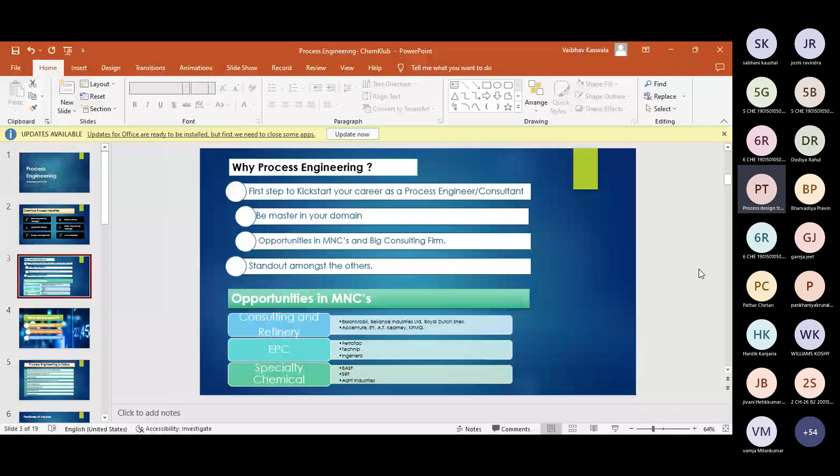When we talk about process engineering, what you will be learning - we will cover what is basic engineering, how basic engineering is done, how designing is done. Basically designing of distillation column, exchangers, pumps, design basis, how to prepare a design basis, heat and mass balance, PFDs, PDS, P&IDs, IPDS. So HMBs (heat and mass balance), PFDs (process flow diagrams), process data sheets, IPDS (instrument process data sheet). Whatever documents are required related to the design, how to prepare those documents, how to select the equipments - that is what we will be focusing on in all our courses.

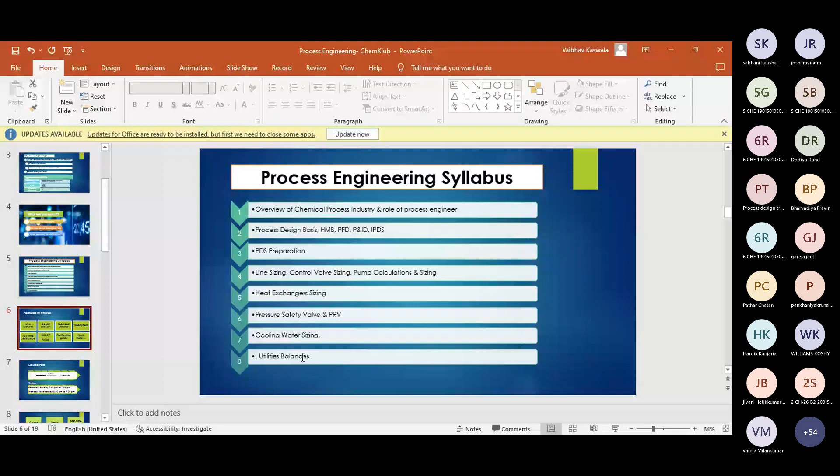So what all features are related to the course that we are displaying? First of all you will be having live lectures. Poora jo course hai uske jitne bhi topics hain uska hum detail time table dete hain based on the date as well as timing, and jo bhi lecture lenge unka naam rahega, tutor ka naam. We will strictly follow the schedule. As per the schedule we will share the link on Microsoft Teams and you can join the live lecture. If some student is not able to attend the live lecture, then you can also have the recorded lectures.

We will separately have a doubt clearing session if any student has doubts. There will be weekly tests. Full time assistance will be there - so at any time anyone has any query, you can directly contact the tutor, or you can post your query on the WhatsApp group also.

Certification guidance - there are also some courses where certification is required, so we also provide courses on HTRI, Aspen, Aspen HYSYS. There we will also help you to get the certification. Uska ek exam bhi rehta hai, so we will also guide you through that certification.

And through our community we will help all the students to know about the industries. We will help them make contacts so that they can get to know other people, other students who are working in this industry. So basically through this we are building a community.

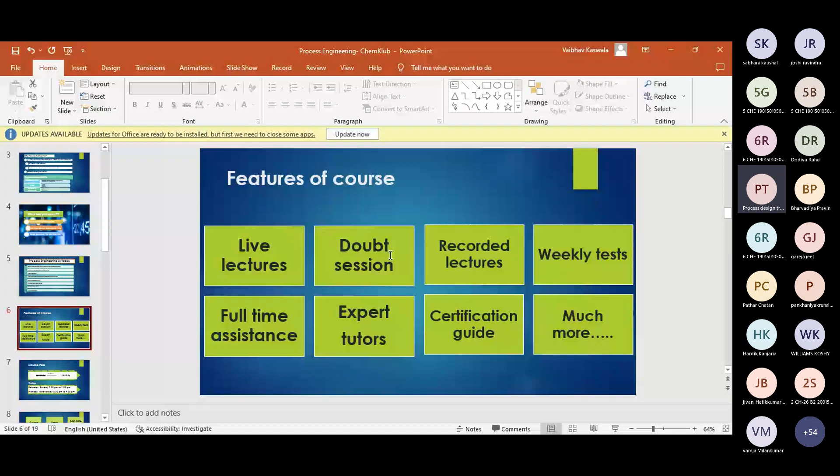Mostly the course sessions happen in the evening, somewhere around 7 to 9. So whoever it is, a student or a working professional who is working from morning 9 to 5, they can easily attend in the evening. We also have flexible timing - if multiple students are not available at a given time, we can shift it.

So basically how you can register - this is our website, www.chemklub.com. You can go to the course section, whatever course you want you can add, make the payment and you are ready to go. If you have a query, our backend team will be there to help you.

So what all different courses will we basically be providing: Aspen Plus, Aspen HYSYS, Aspen EDR, and Process Design Engineering. This course is the well-known course where we'll be covering the entire designing part. Distillation - we also have a very short course on distillation. And PSV sizing.

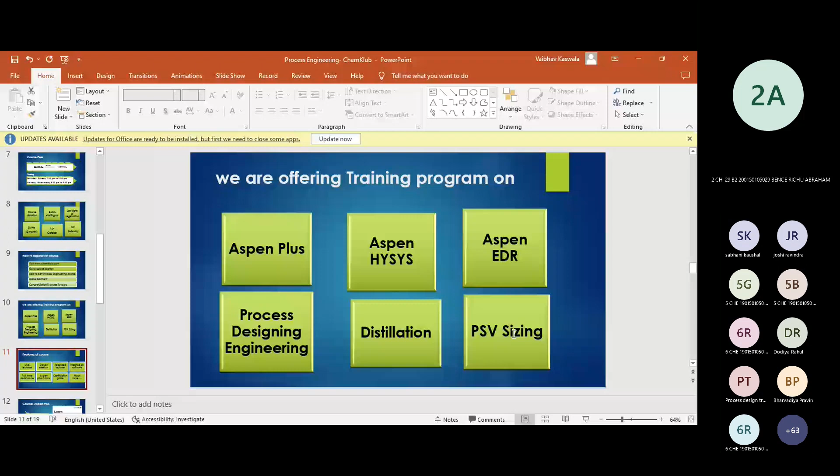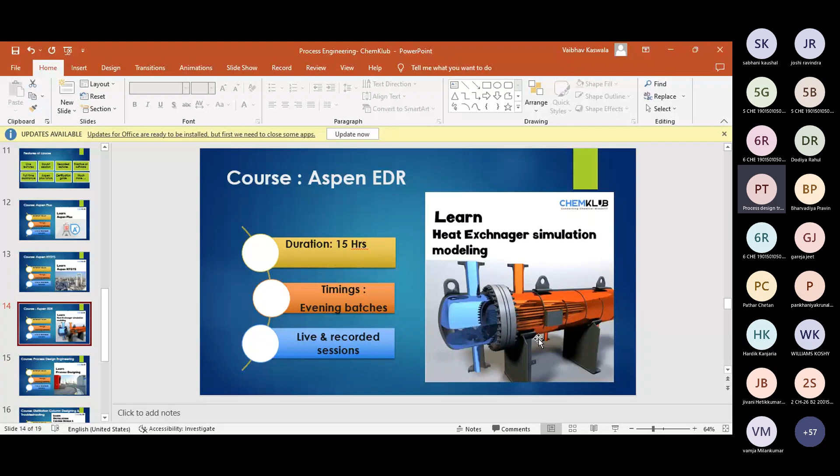Related to Aspen Plus, the course duration is 24 hours, mostly an evening batch. Similarly for HYSYS, it is again the same - a 24 hours course. So mostly every day a 1 hour session will be there, and this course will take place in 1 month. So these two, Aspen Plus and HYSYS, are both 1 month courses. Aspen EDR is again somewhere around 1 month, less than a month course. Process Design Engineering is a 2 month course, detail engineering. So let me let you know how this Process Design Engineering course is.

Distillation - this is a 10-day course where everything related to distillation, A to Z, right from the core principles and principles of distillation to its design, troubleshooting, selection, internal sizing - everything related to distillation, totally the design related to the distillation column, we are covering. So this is a short 10 days course.

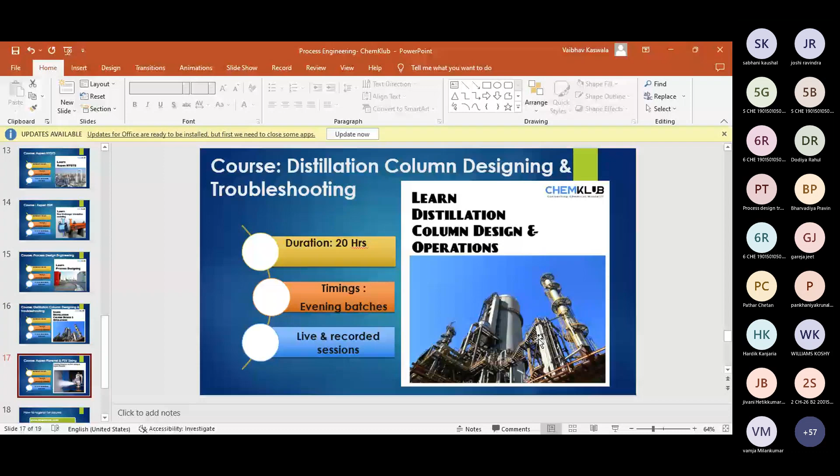Aspen Flarenet and PSV sizing - related to process safety, it is also again a 1 month course. So this is the range of our courses that we are providing, correct?

Okay, so that's it, this is basically about the ChemKlub. So does anyone have any queries related to the courses, or any questions till now? Anyone, any student want to ask anything?

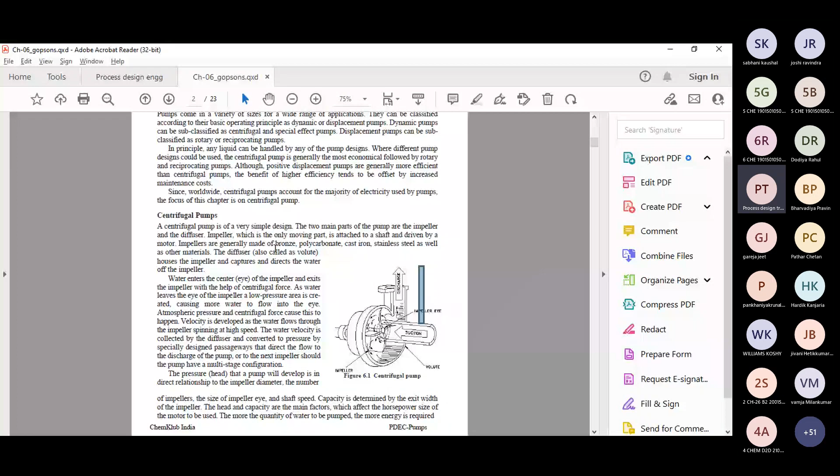So the principle of the pump says: the principle of the pump is when the water or any fluid enters the eye of the impeller and exits the impeller with the help of a centrifugal force. So it basically boosts the kinetic energy, and ultimately it develops the pressure. So that is how basically a pump will operate.

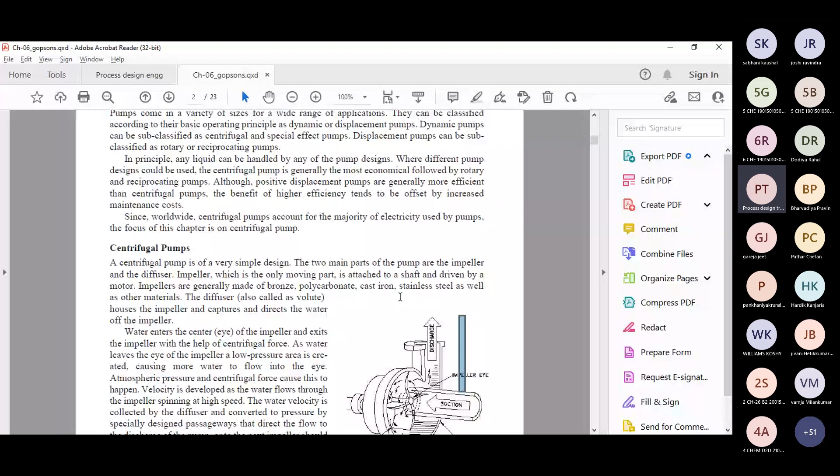So what are the different parts of the pump? When we see a pump, there is one suction, one discharge, there is the impeller, which is the main part of the pump, on which this pump will be operating. So what is the impeller?

Inside the impeller there is basically an assembly which is connected with the rotor, and when the rotor rotates, that impeller is designed in such a way that it will direct the fluids towards the periphery and ultimately discharge it out of the pump. So the pump basically increases the velocity of any fluid and ultimately develops the pressure.

So now can anyone tell me which law will be applicable to the pump? We study this in college, so which law is applicable to the pump? Which equation will the pump follow? Yes, you must have studied this in fluid mechanics. Can anyone tell me? Anyone?

Velocity increase, pressure decrease. Yes. Which law is applicable? Sir, FMT laws. Yes, your voice is not clear. Continuity equation. Yes, so that is basically, sir, Bernoulli's equation. Bernoulli's equation will be applicable, right?

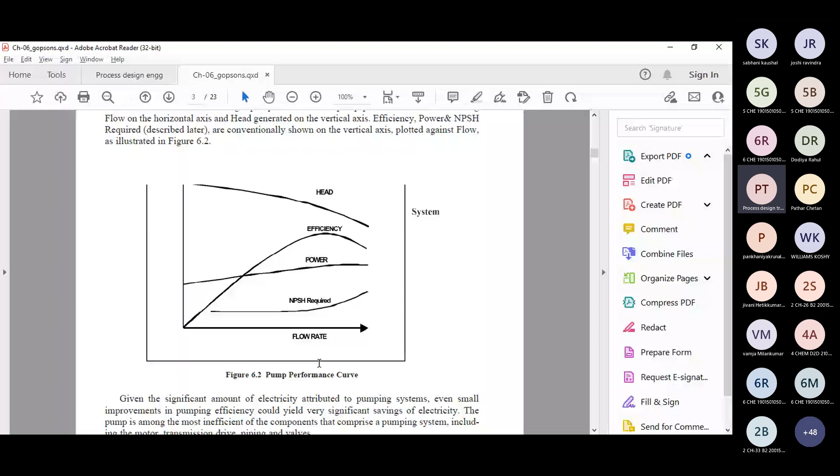पंप कर्व्स के बारे में पढ़ा है सबने? No sir. ओके, तो पंप कर्व्स मतलब क्या रहता है?

So whenever you are operating a pump - जैसे कि आप कभी भी कुछ चीज परचेज करते हो, आप एक्सपायरी डेट, इंग्रेडिएंट्स, कंपनी, टेस्ट देखते हो। Similarly, whenever you are buying a pump, before buying it the vendor will supply you with the pump curves. वो pump curves में आपको शो करेंगे कि अगर हमारा पंप चलेगा तो how it will be operating. So that is basically the pump curve. This is the most highly important topic related to pumps.

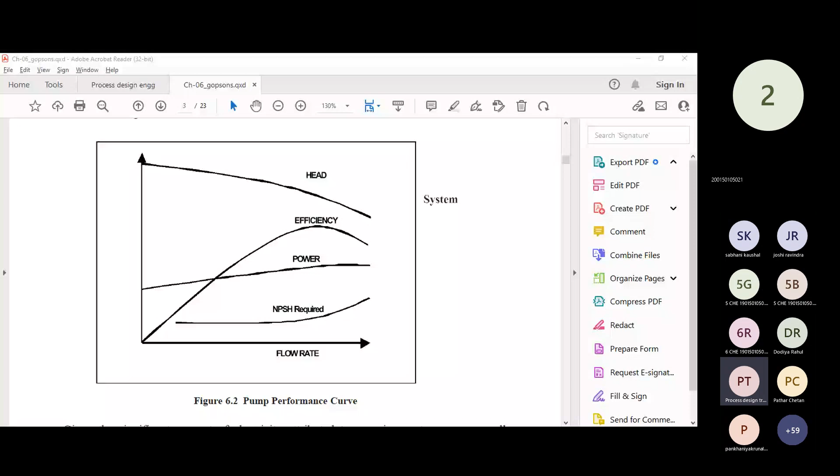So just my advice is be thorough with the pump curves, because you will definitely 100% face these questions in your future interviews or campus recruitments. So this is a very important topic.

So when we talk about the pump curve, on the x-axis always there is a flow rate - that is the flow rate of the pump. अगर समझ में नहीं आया, any doubt है, then you can ask in between. So with respect to the flow rate, how the different parameters will vary for that particular pump, that basically the pump curve will show.

So on the y-axis when it is the head, that is the pressure developed by the pump. जब भी आपका flow rate zero है, on x-axis it is zero, तब आपका head maximum है, because your shut off valve, your discharge valve is closed. तो जब भी पूरा पंप का आउटलेट वाल्व क्लोज है तब फ्लो रेट जीरो होगा और प्रेशर मैक्सिमम होगा। जैसे आप वाल्व खोलोगे तो आपका फ्लूइड मूवमेंट शुरू हो जाएगा।

So your fluid is getting some velocity. As the velocity increases your pressure starts dropping, because Bernoulli's equation कहता है velocity head मतलब v square by 2g। So your velocity starts increasing, so your pressure will start decreasing, because p plus gz plus v square by 2g is always constant as per Bernoulli's equation. So your pressure starts to drop. So that is basically the head and flow rate curve.

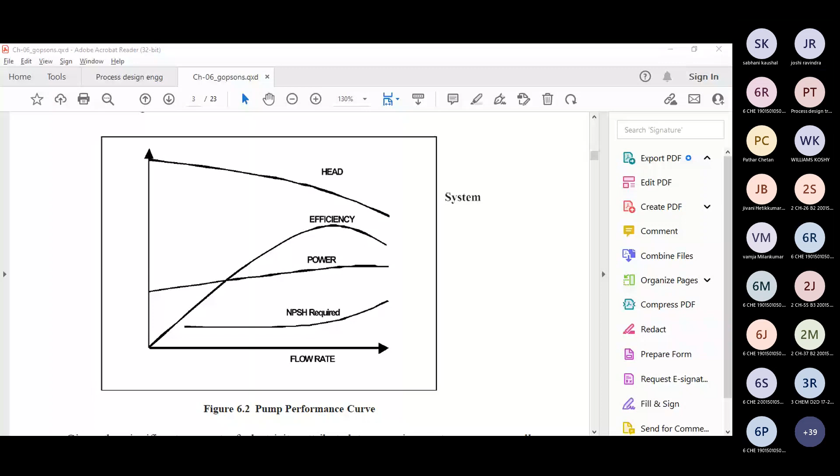So we have the equations for the power that is generated. So how basically you will be calculating the power, right? Power में भी कैसा रहेगा?

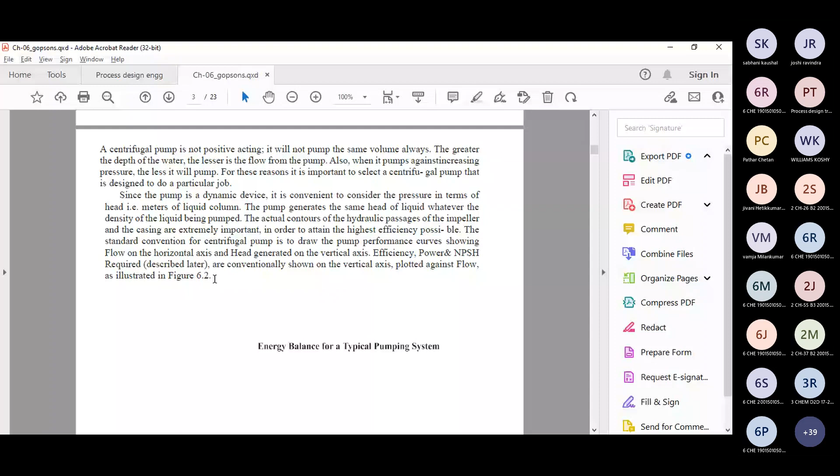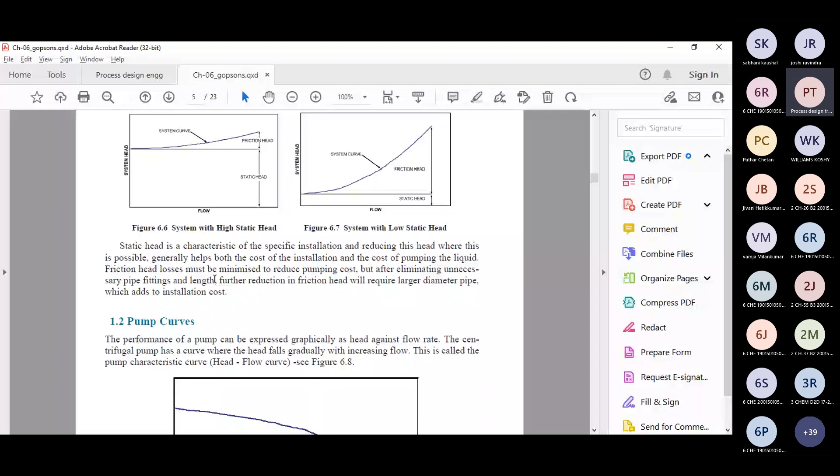So when we talk about the power, ऐसा क्यों हो रहा है?

आपका first of all you are giving some power to the motor. To the motor that power is going to the pump, and from the pump that power is going to the fluid. तो जो पावर, हाइड्रोलिक पावर मतलब क्या हुआ, आपको जो वर्क डन मिला बाय द पंप.

सो वर्क डन बाय द पंप इज बेसिकली रिलेटेड टू हेड एंड फ्लो रेट ऑफ द पंप. तो पंप ने कितना वर्क डिलीवर किया, वो डिवाइडेड बाय पंप को कितना पावर मिला - सो वर्क डन बाय द पंप डिवाइडेड बाय द पावर सप्लाइड टू द पंप, दैट इज बेसिकली कॉल्ड द पंप एफिशिएंसी.

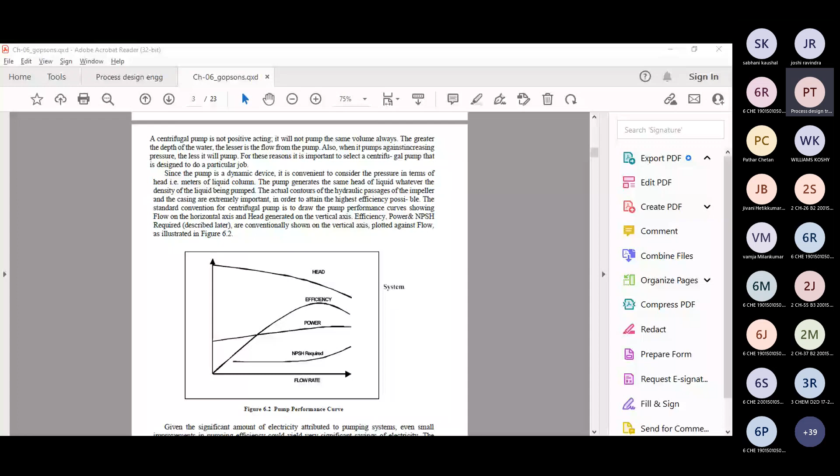तो ऐसा भी हो सकता है कि पंप को जितना पावर दिया, उसमें से पंप ने कुछ वर्क किया - the work done by the pump - और पंप ने कुछ लॉसेस दिए, losses related to friction, losses because of cavitation. आपका पंप गर्म हो जाएगा, it is dissipating some energy in terms of heat, frictional losses, heating of the sealing system, heating of the shaft. So that is basically the losses from the pump, so उसका efficiency कम हो जाएगा. That is related to the pump efficiency.

Similarly motor will also have some efficiency. Suppose you are supplying 100 kilowatt of energy to the motor, then motor will give 85 kilowatt of energy to the pump. 85 kilowatt pump का input हुआ, जिसमें से आपको effective 65 kilowatt of work done you will get. So आप देख सकते हो कि 100 kilowatt I am supplying और मुझे सिर्फ end में 65 या 60 मिल रहा है। So there is a drastic consumption of energy because of losses.

So आपका मोटर में लॉसेस क्यों होता है? कोई बता सकता है why there is losses in motor? और generally you will be shocked to see कि अगर मोटर में हम 100 किलोवाट पावर देते हैं, then motor gives generally 80 किलोवाट ऑफ आउटपुट. सो 20 किलोवाट, approximately 20% losses happens in the motor. So why that losses happen?

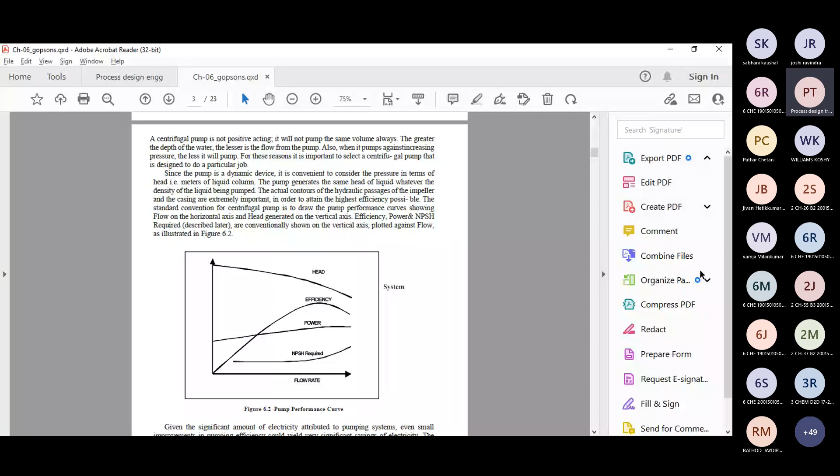So basically hydraulic power is the flow rate multiplied by the total head developed by the pump multiplied by the density, the gravitational constant, divided by 1000. So what is the pump shaft power?

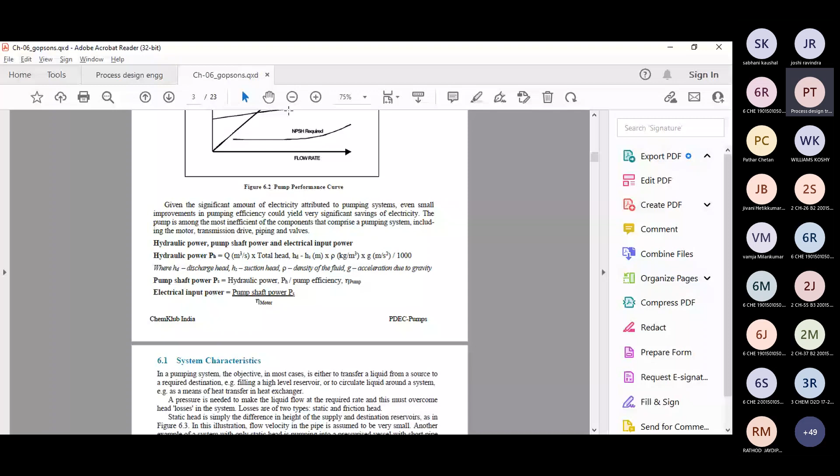यहाँ पे हम pump shaft power - what we do in industry - either you calculate the efficiency or you calculate the input to the pump shaft. So generally efficiency of the pump is equal to hydraulic power or the work done by the pump divided by the power provided to the shaft. So हम क्या करते हैं, we assume the efficiency. Suppose हमारा pump 70% efficiency से काम करेगा, तो हमें उसको कितना shaft power देना है. So suppose I have some flow rate, some head I have decided, so I want my pump to do some hydraulic work. So that is the hydraulic power divided by 0.7, because my assumption is I want to operate my pump at 70% efficiency. तो मुझे पता चलेगा कि पंप के शाफ्ट को कितना पावर देना है.

So once that power is calculated, what is my electrical input power? The pump shaft power divided by the efficiency of the motor. Now efficiency of the motor is 80%, so that is 0.8. Whatever power comes out, this power is the power input to the motor.

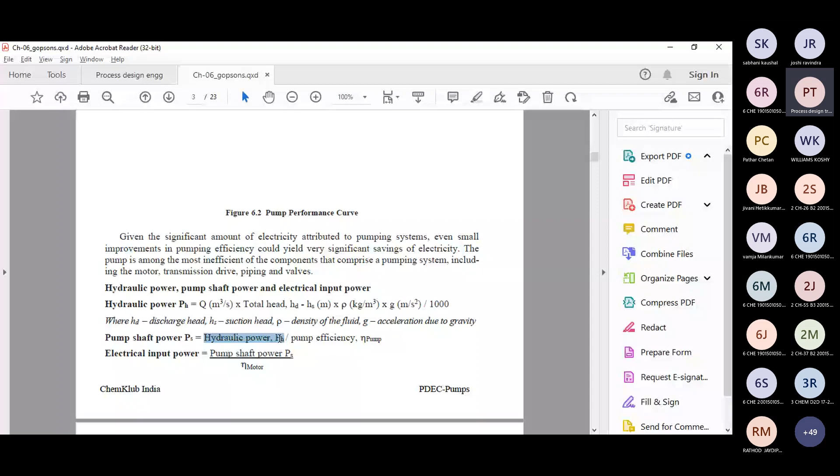So I need to give the motor a particular power, because of which 80% loss will happen in the motor, 70% loss will happen in the pump, and then I will get my desired hydraulic power, or my pump will give the desired work done. Correct? So this is how basically we will do the sizing and power load calculations for the pump, right?

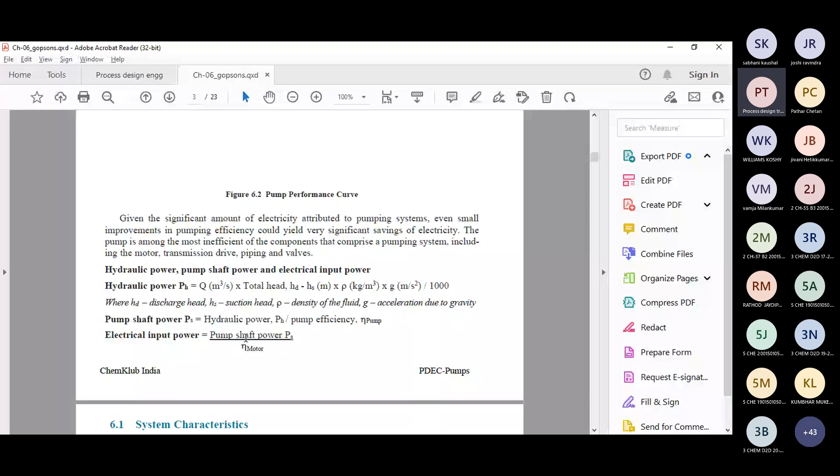So moving ahead, we have different case studies. What are the system characteristic curves, right? So all these details, the system curve, friction head versus flow curve. There is still a huge amount of depth in this particular topic, right?

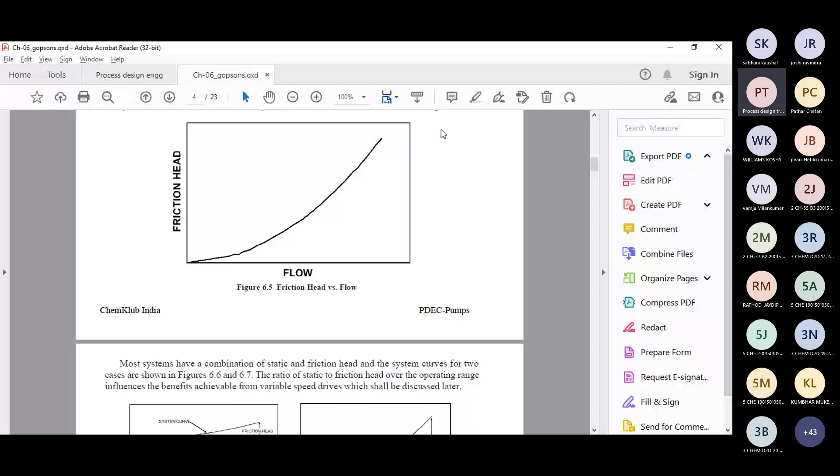So what I meant to give is how basically this sizing will be done, right? How we are providing the material, so that it can be useful for the students. They can also learn in a simpler way whatever topics are not covered in academics, that we will be covering over here. So the main aim is to bridge the gap between academics and industry, so that it will be easier for students to understand.

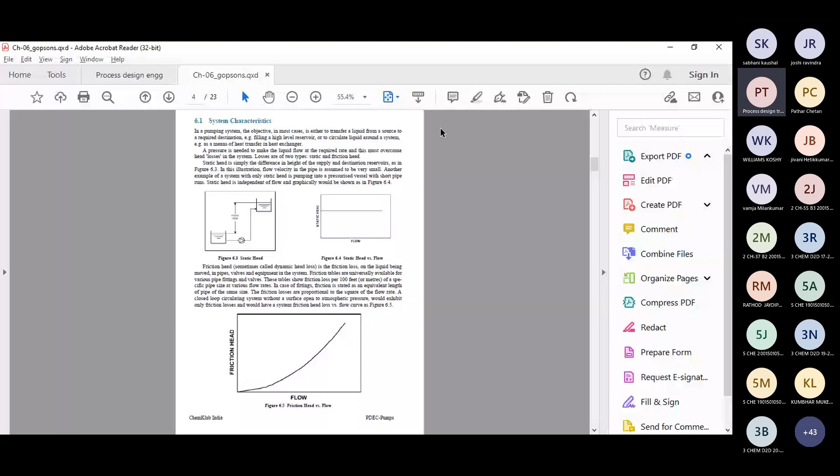So generally what happens is whenever students go into industry, it takes at least 2 to 3 years to get settled. You'll take 3 years getting used to it, understanding the concepts. So if you are going through this course, you are understanding it even during your college days. So once you join the industry, whatever 3 years you were taking, that time will be shortened. You'll start learning everything within 1 year. So you will be easily able to understand how it is basically operating, correct?

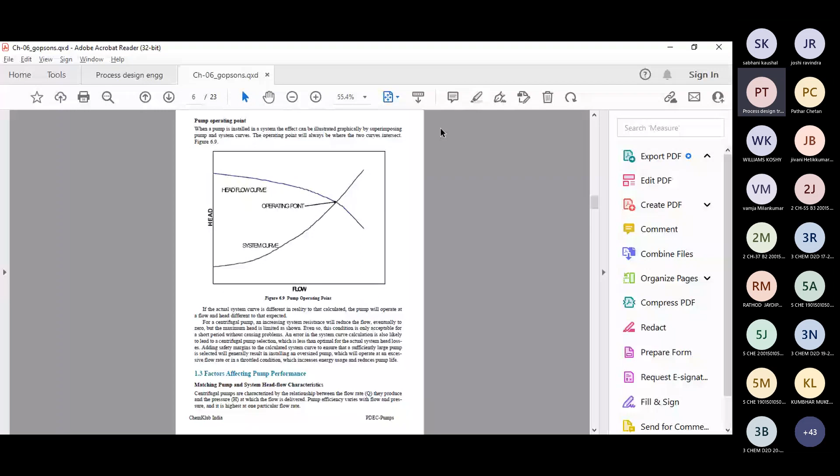So that is about the pumps, how this is... some case study, that is effect of oversizing of pump. If someone makes a mistake and oversizes a pump, this is how that can affect things.

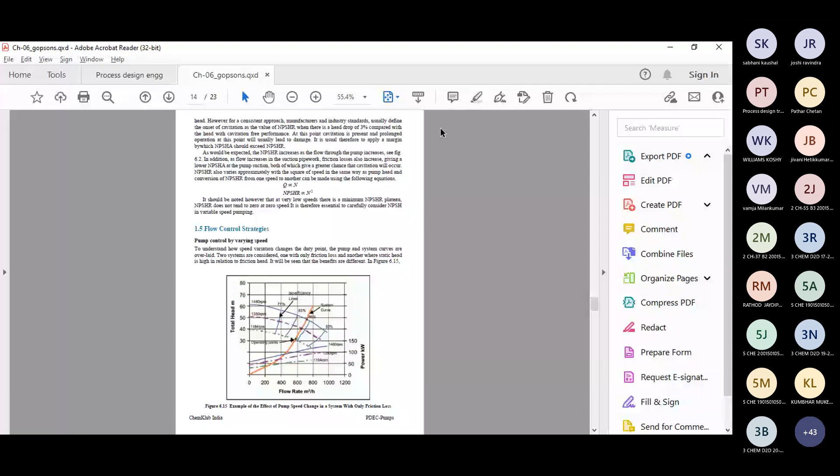Hello, sir. I guess your voice is not there. We can't hear you, I guess.

Hello. Yes. Hello. Everyone, is able to hear the voice of sir? No, ma'am, we are not able to. Yeah, okay, I'll just talk to him. Just a minute please.

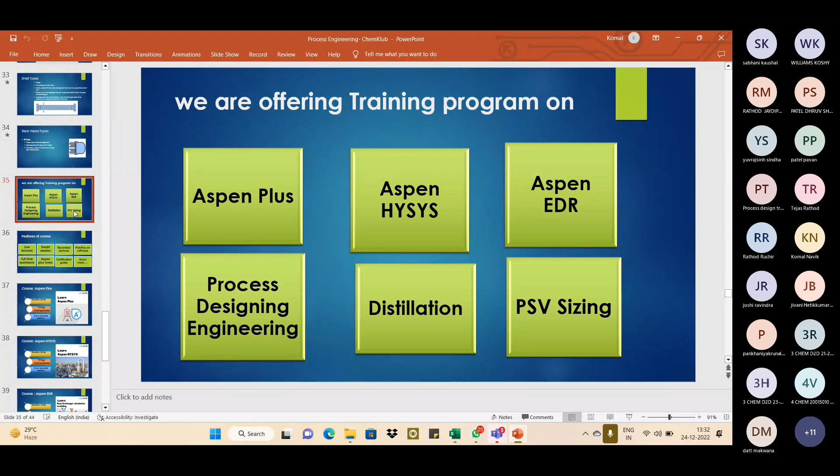So these are all the training programs we provide: Aspen Plus, Aspen HYSYS, Aspen EDR, Process Design Engineering, and the course duration is this. If you have any doubts till now, you can ask me, or otherwise if sir has joined, we can continue.

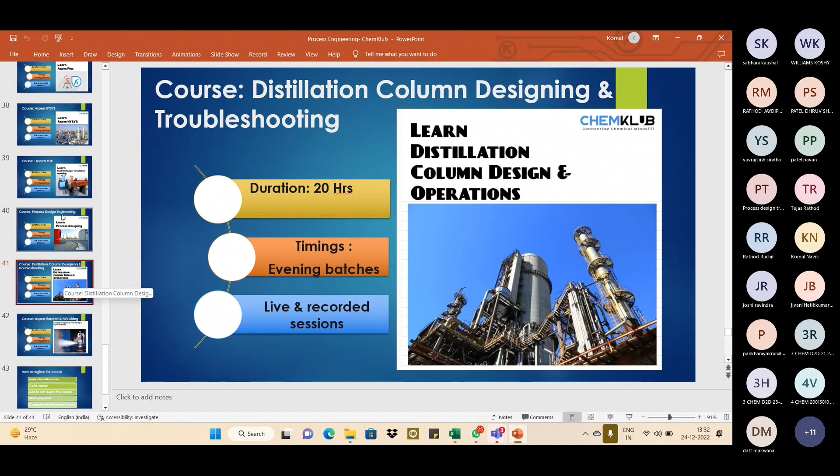Yes, does anyone have any doubt? Hello. Ma'am, yes ma'am, can you change the meeting setting? Someone is removing continuously, who is removing? Just let me check. I guess one of you is doing something.

Anything regarding the courses or training programs? Do you have any doubts? So we can go for that.

Please be interactive, make this session interactive. If you have any doubt, you can ask, because at degree level now you have this golden opportunity to learn all these things. After you graduate, you must acquire some skills, and you must spend your time in these training programs that you should learn during your degree. Then why are you getting late? Many people waste their time after the degree, and you have this opportunity to learn on this platform.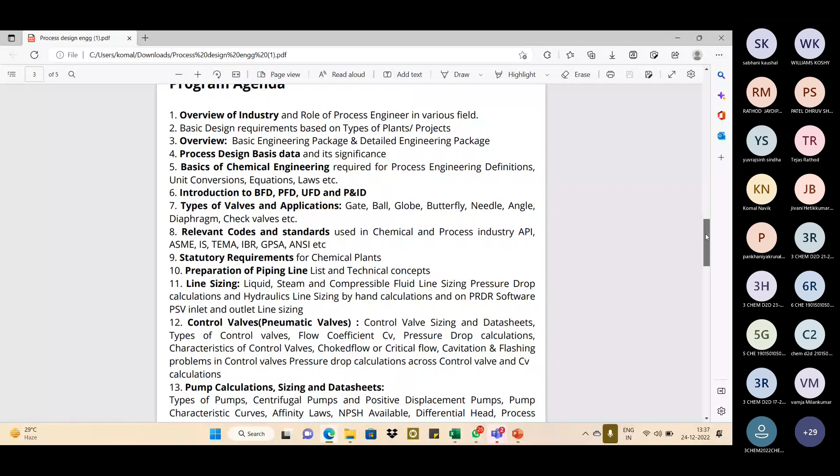Process design engineering - I have already told you all that this is a basic and detailed course for a process engineer. Am I audible to everyone? So what you need to do as a process engineer and what things you should be aware of - an overview of the industry, the role of a process engineer in various fields, and the basic requirements for a process engineer - you will learn from this course.

What are basic engineering packages and detailed engineering packages? What are the process basics - process design engineer basics like material and energy balance you should be aware of, different types of valves, unit conversions you need to know. Then all types of BFD, PFD - you must be able to read P&ID, BFD, PFD. BFD is block flow diagram, PFD is process flow diagram, and P&ID is piping and instrumentation diagram.

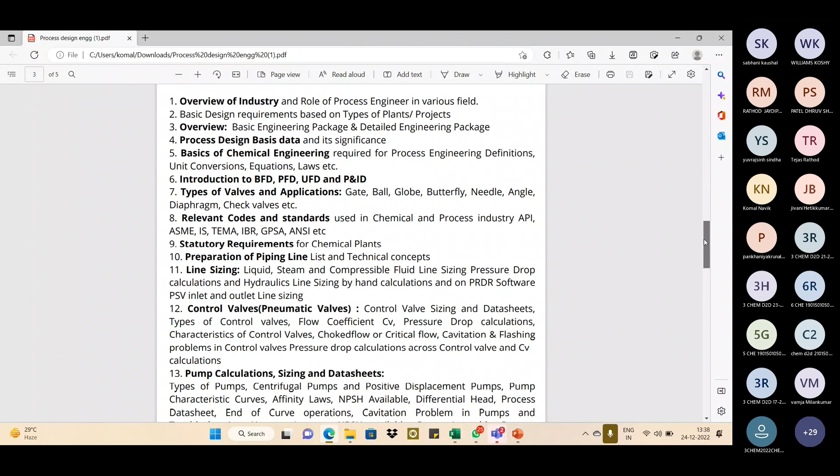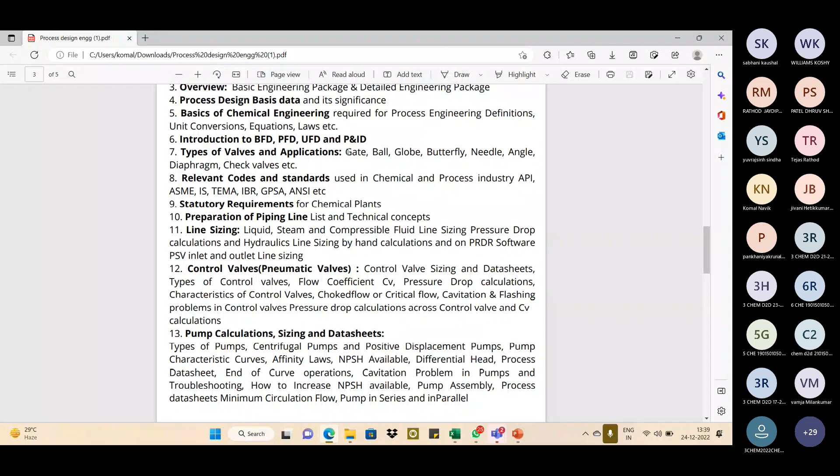All the types of valves you have already learned in your BTech program, like gate valve, ball valve - what are their purposes, what different purposes we use different types of valves for. You will learn this in detail. Codes and standards - like TEMA which we use for heat exchanger designing. There are different codes and standards we must be aware of to design any equipment. ASME is there for PSV sizing, and also distillation.

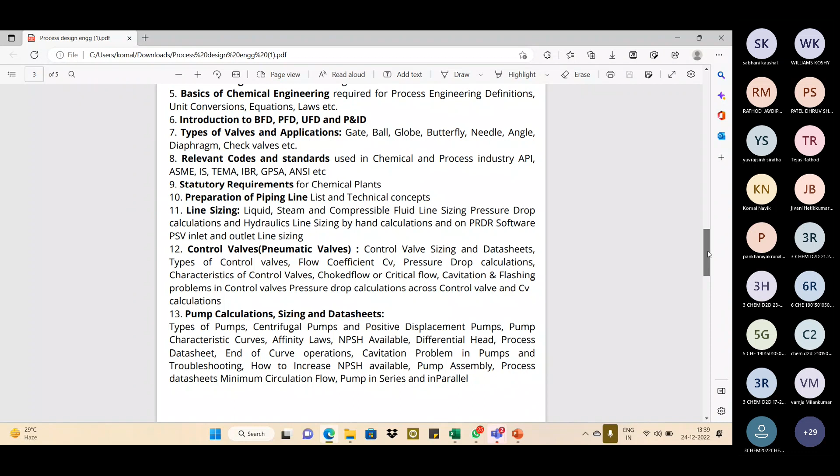Then preparation of piping line - how to do line sizing, if there's a liquid, steam or compressible fluid, what will be the pressure drop calculation. Hydraulics of a particular thing like line sizing by hand. Then control valve, and for equipment designing we include control valve, pumps, heat exchanger, distillation column, PSVs, storage vessel, pressure vessel, storage tanks. Wherever calculations are involved in designing equipment, we will have Excel sheets available to students, and calculations will be done live in the classroom session so students can understand how they are done.

Sir, you can go ahead if you're able to speak. Yes, so you can scroll down whenever I tell you. So basically, right from the preparation of the design basis, we have the heat and material balance. Then we will let you know how to prepare the BFD - block flow diagram, process flow diagram, UFD. This will be part of basic engineering. Once basic engineering is done, we will focus on detail engineering.

So what are the different types of valves, how should valve selection be done? What are the different codes and standards used for designing, and why they're required? What are the different statutory requirements - what is the Boilers Act, what is the Factories Act? All the codes which are legal or statutory requirements that a design engineer must know will be included. Then preparation of line list, line sizing - what should be the diameter, the economical pipe diameter, the schedule number. All these things we will be covering.

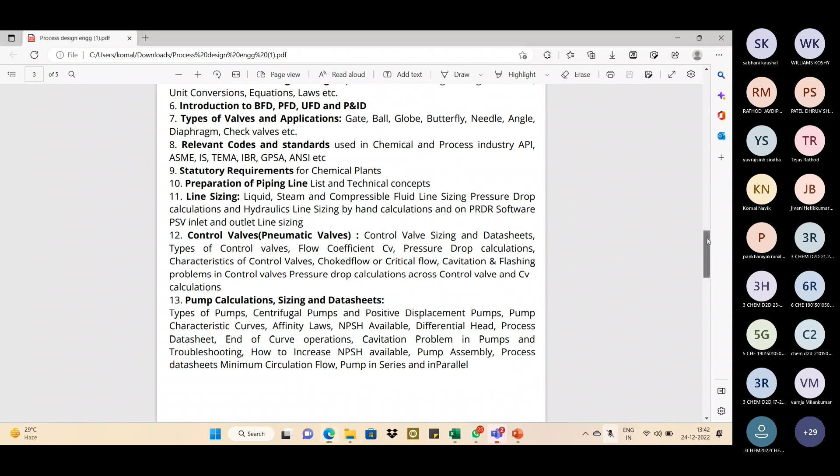Other than that we have storage tanks, right? So design of a storage tank also. So next one is data sheets of different equipments, heat exchanger design, heat exchanger operations, right?

Air moisture separators, and we'll also cover flash separators, related to the pressure safety valve, then entire sizing of the pressure safety valve based on different scenarios. Then there is fire case, blocked outlet case, over pressurization case. So for different cases there will be different designs, that we will see.

Similarly for instrument process data sheet, there are basically flow transmitters, flow meters, level transmitters, pressure transmitters, temperature transmitters. So how to select different types of flow meters? When it comes to flow meters, we have magnetic flow meter, vortex flow meter, Coriolis mass flow meter.

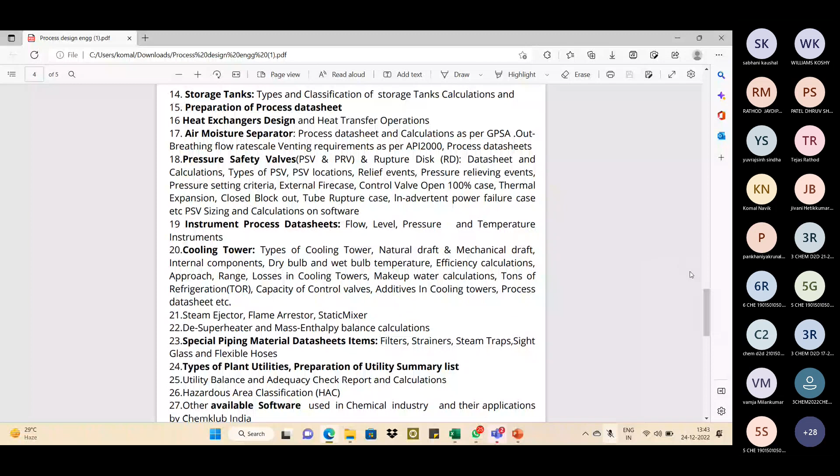So that we will see related to the cooling tower sizing. We will see how the cooling tower should be sized based on the range, based on the approach, based on the WBT, dry bulb and wet bulb temperature, what are the tons of refrigeration, and how the efficiency of the cooling tower is calculated.

Steam ejectors, flame arresters, static mixers - these are all special kind of equipment. This will be covered in SMDS, special material data sheet. De-superheaters, mass and energy balance equations.

So what is the latent heat, what is the specific heat, how it has to be used, how the calculation has to be done for utility requirements. So different utilities, how to prepare the list of utilities and capacity of the utilities. What is hazardous area classification.

And finally we'll see what are the different softwares that are available in industry and how to use that software, so that most of our calculations - whatever manual calculations which we are doing, that is already formulated, already documented, and with the number of iterations that is running behind the software.

There are different logic diagrams, some models are running in the background of the software. So once you know what the manual calculations are, what the concepts are, you can switch to the software part. Once you are through with the basics, you can also start learning the software.